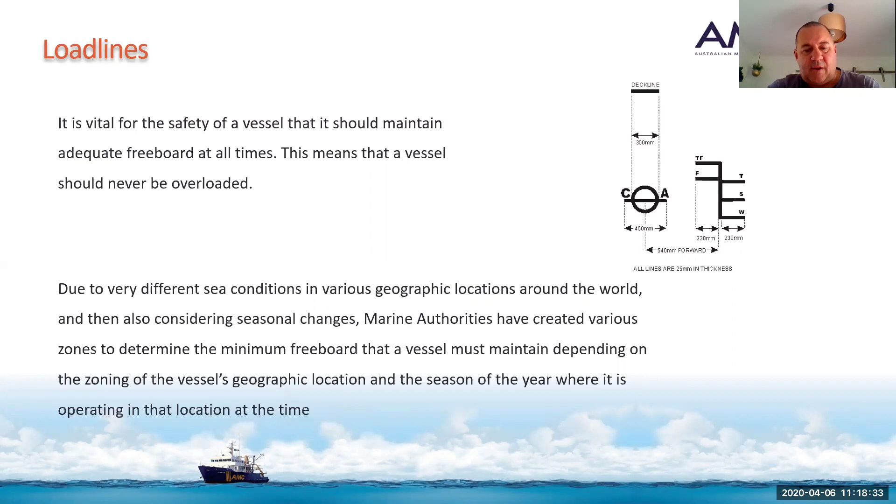Due to varying sea conditions in various geographical locations around the world, and also seasonal changes, marine authorities have created various zones to determine the minimum freeboard a vessel must maintain depending on the zoning of the vessel's geographical location and the season of the year it's operating in. Marine authorities assign freeboard to vessels on the basis that certain conditions are met.

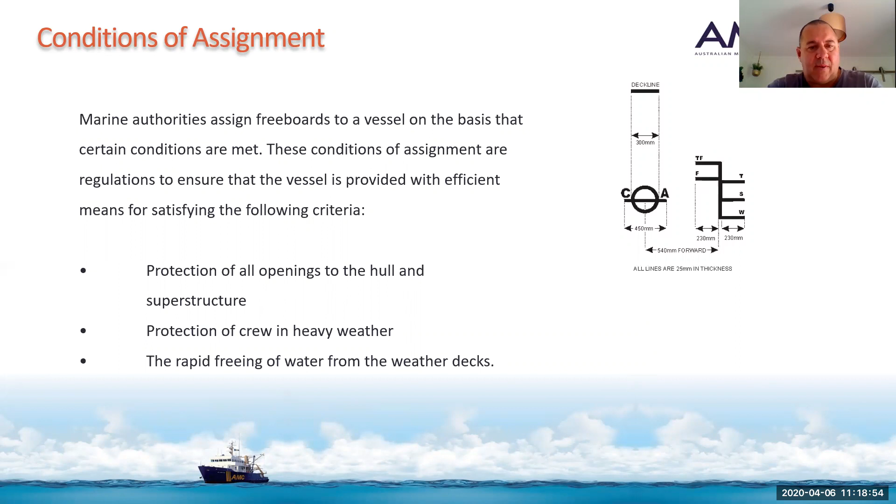These conditions of assignment are regulations to ensure the vessel is provided with efficient means for satisfying the following criteria: protection of all openings to the hull and superstructure, protection of crew in heavy weather, and the rapid freeing of water from the weather decks.

Freeboards are only assigned when the marine authority is satisfied that the vessel complies with the applicable conditions of assignment. These conditions deal with topics such as stability, bulkheads, access openings in bulkheads, cargo and other hatchways, hatchway covers, protection of openings, ventilator coamings, air pipes, cargo ports, discharge inlets and scuppers, side scuttles, guardrails, and loading information.

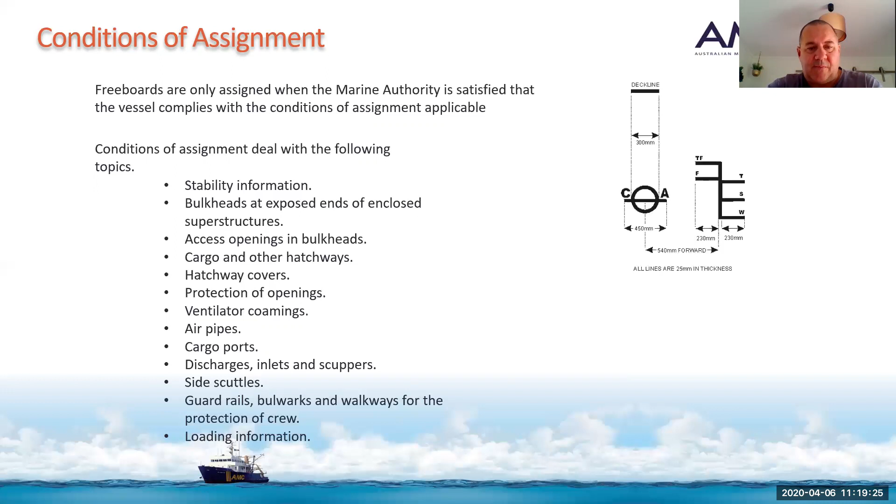So you might have seen a few of these load lines on ships, definitely on cargo ships. The C of A means the Commonwealth of Australia.

On the other side, down the bottom we've got the winter load line, the summer load line, the tropical load line, and on the left-hand side of that line, the freshwater load line and the tropical freshwater load line. These all have markings that have to be a certain width and dimension.

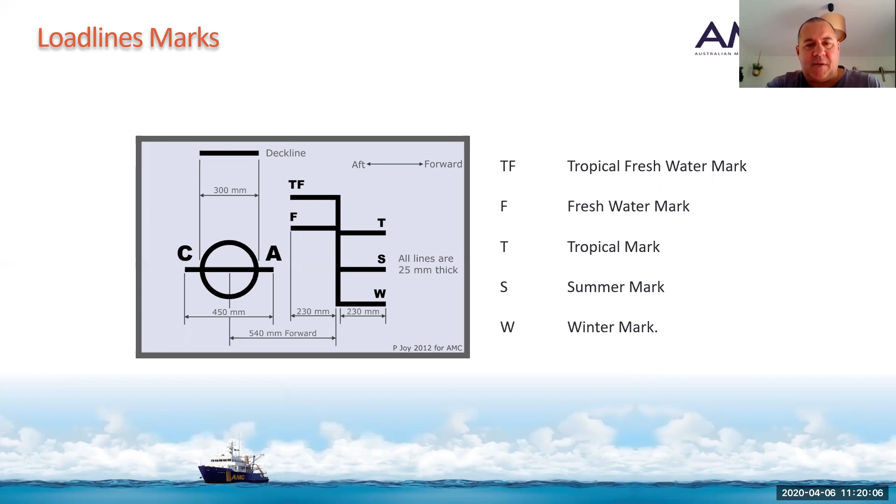They're welded on the side of cargo ships so that we don't move them around when we go back into docks. We don't need to remember, for the Master 35, those particular measurements and how big they are, but they're there for your information.

Australia has different zones, which is all to do with the weather throughout the year. You're in the tropical zone right up the top part of Australia and down to the Whitsundays. You can probably imagine the weather up there is beautiful and calm most of the year within the Whitsundays down the coast.

So they can load up their vessels to the tropical zone, putting more cargo on because they're going to be deeper in the water, but not going to be subjected to heavy and violent weather, as opposed to us here in Tasmania, down the southern part. The weather gets pretty ordinary down there.

So you're not loaded up as much, giving you that extra stability in case the weather is poor.

If a vessel is floating without list in still water of a relative density of 1.025, the load line mark on either side of the vessel that is appropriate at that time would be submerged.

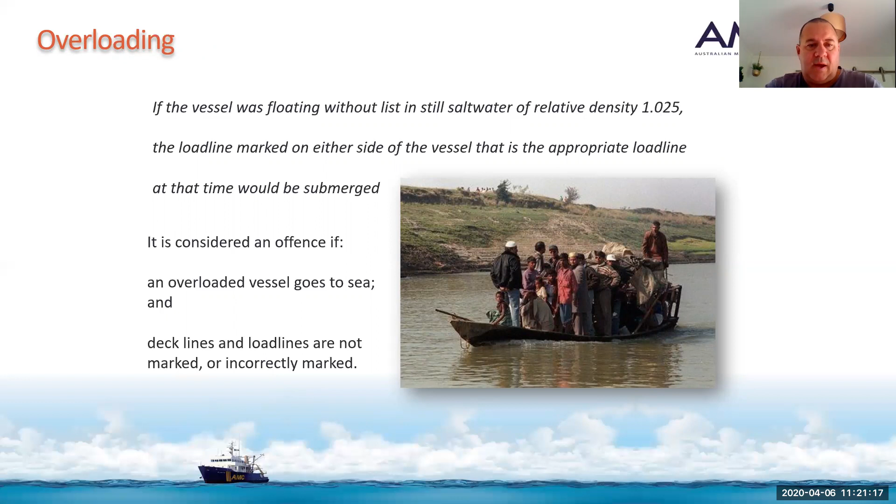It is considered an offence if an overloaded vessel goes to sea and the deck line and load lines are not marked or incorrectly marked.

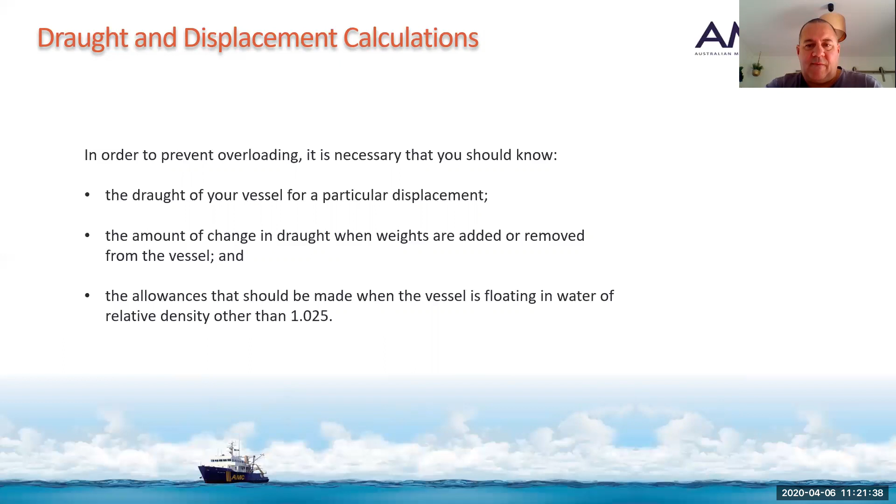In order to prevent overloading, it's necessary that you should know the draft of your vessel for a particular displacement, the amount of change in draft when weights are added or removed, and the allowance that should be made when the vessel is floating in water other than a relative density of 1.025.

So the waterline is just touching the bottom of the 6, after the 1 metre mark. Therefore, the draft is 1.6 metres. If the waterline was just touching the top of the 6, the draft would be 1.7 metres.

If the waterline is not exactly at the top or bottom of the number, you need to interpolate by eye to get the draft reading. For example, if the waterline was exactly at the centre of the number 6, the draft would have been 1.65.

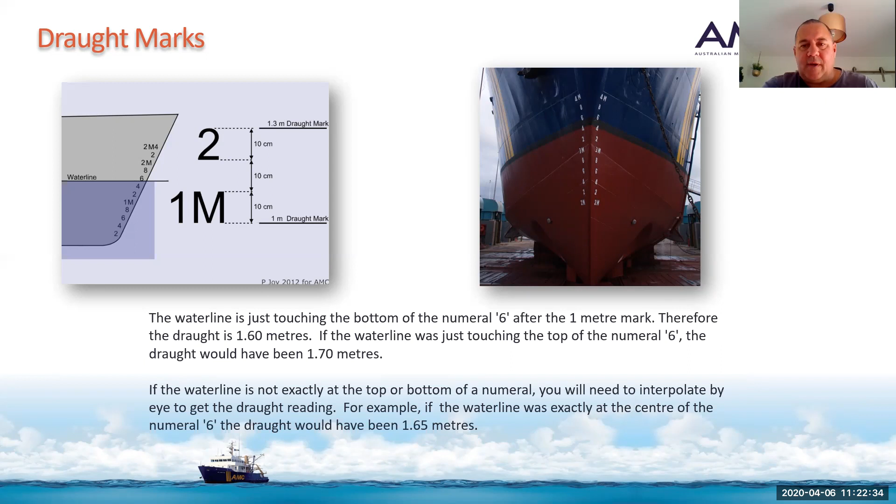If the vessel's aft draft is greater than its forward draft, the vessel is said to be trimmed by the stern. If the forward draft is greater than the aft draft, the vessel is said to be trimmed by the head, and the mean draft is the average of the fore and aft draft. Trim is the difference between the forward and aft draft.

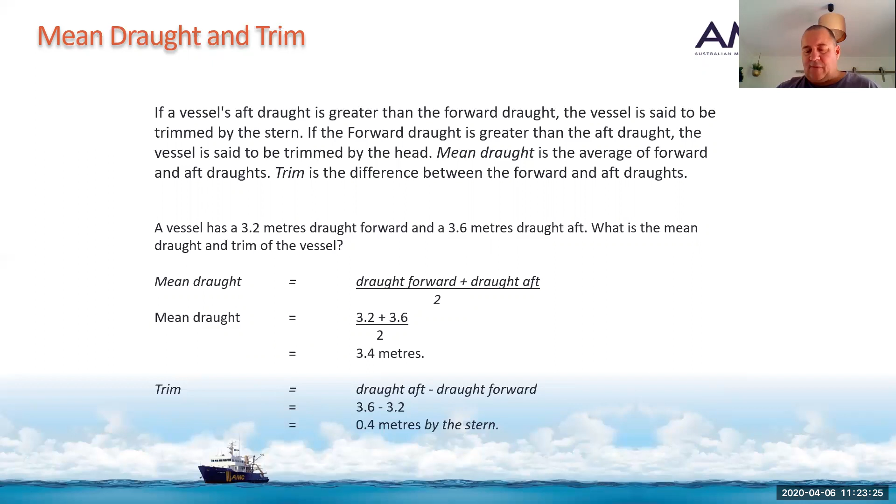So a vessel has a 3.2 metre draft forward and a 3.6 metre draft aft, what's the mean draft and the trim of the vessel? So the pretty simple calculation here, mean draft is the draft forward plus draft aft, divide by 2. So 3.2 plus 3.6 divided by 2, you've got a mean draft of that vessel is 3.4. The trim is the draft aft minus the draft forward. So it's 3.6, subtract 3.2, and it's 0.4 metres by the stern.

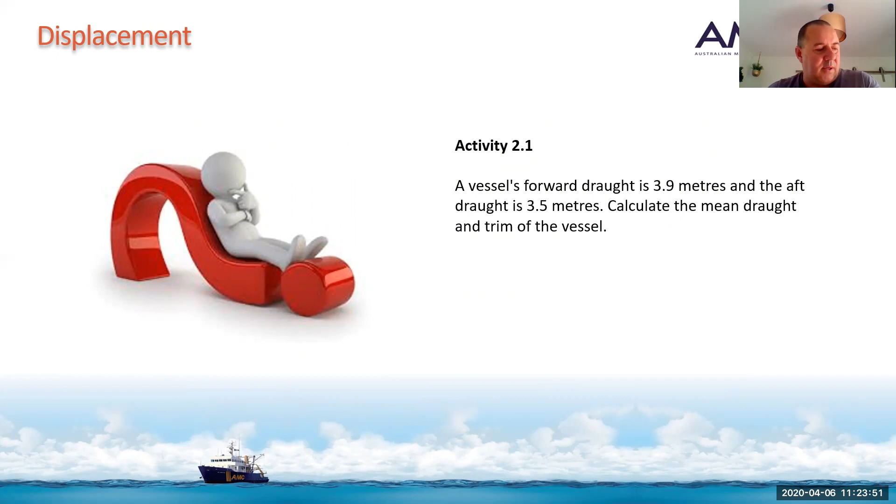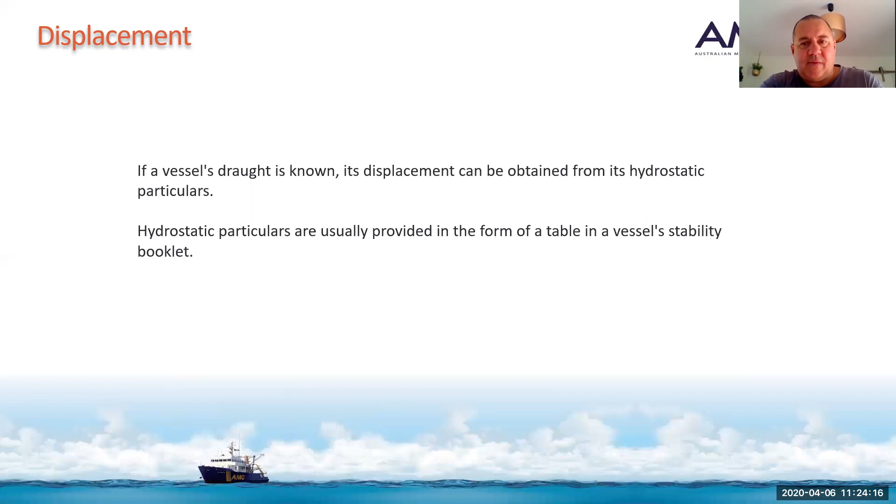If a vessel's draft is known, the displacement can be obtained from the hydrostatic particulars, and the hydrostatic particulars are usually provided in the form of a table in the vessel stability booklet, which is what you used in chapter 1 to do our TPC. So we know that it's got our drafts in there and our weights and our TPCs. And there we have a simple activity there from using the hydrostatic tables in the FTV Bluefin.

How can we use the hydrostatic tables to determine how much cargo or ballast to load or unload to achieve a desired draft? So the Bluefin is floating at a mean draft of 3 metres and the trim is 0. How much cargo can be loaded on the vessel so the mean draft does not exceed 3.3? So you could go to the hydrostatic particulars, you look at the draft at the moment, it sits at 3 metres and it weighs 407.5 tonnes. And at 3.3 metres, the weight would be 480.1 tonnes.

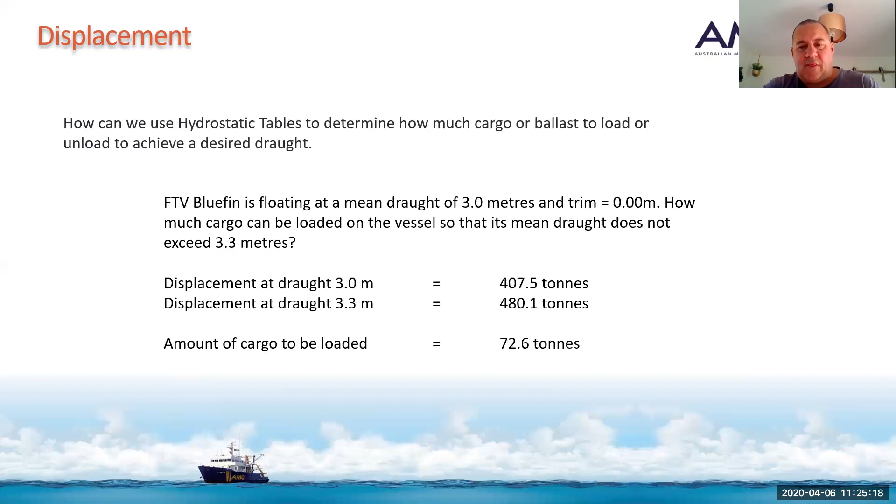So how much cargo can be loaded to get to 3.3? It's just a matter of doing that calculation. 72.6 tonnes can be loaded on that vessel to get it to a draft that doesn't exceed 3.3. Activity 2.3 there for you. We don't use TPC when we're loading and discharging a large amount of weight that has a significant change on the vessel's draft. TPC is only used for doing small amounts of changes.

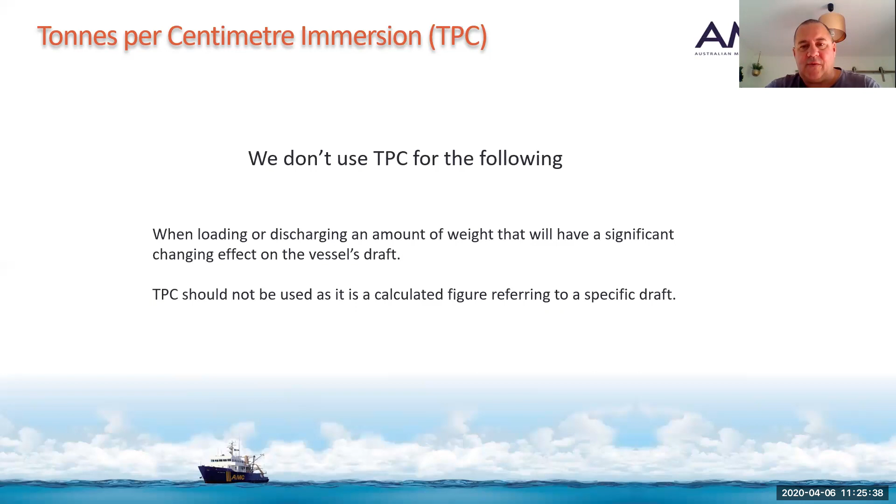All right, so now we talk about the saltwater and the freshwater allowance on a vessel. So freshwater allowance, or FWA, is the number in millimetres by which the draft of a vessel changes as it passes from salt water to fresh water. So the arrow there, the upper edge of the saltwater mark, indicates the draft to which a vessel may be loaded when floating in salt water with a relative density of 1.025 in a summer zone. The upper edge of the F mark indicates the draft to which a vessel may be loaded when floating in fresh water with a relative density of 1.000 in the summer zone.

If a vessel was loaded in fresh water up to the F mark in the summer zone, a vessel will automatically rise to the saltwater mark when it goes into salt water, and the distance between the upper edge of the S and the upper edge of the F is the vessel's freshwater allowance in millimetres.

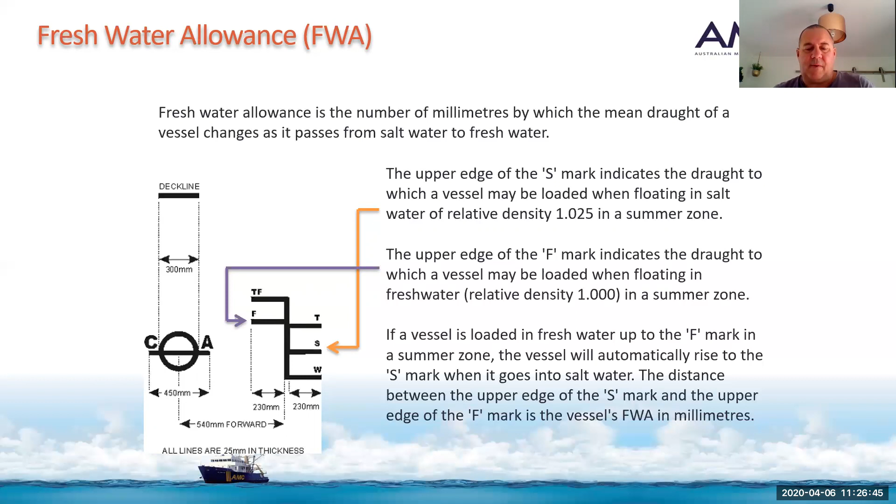So suppose a vessel is floating in dock water of density that is neither fresh nor salt water, but somewhere in between. In this case, the vessel can submerge its summer mark by the amount known as the dock water allowance, or DWA. The vessel will then automatically rise to the summer mark when it goes into salt water.

Dock water allowance depends upon the density of the water that the vessel is floating in, and therefore you determine the density of dock water before you can calculate the dock water allowance.

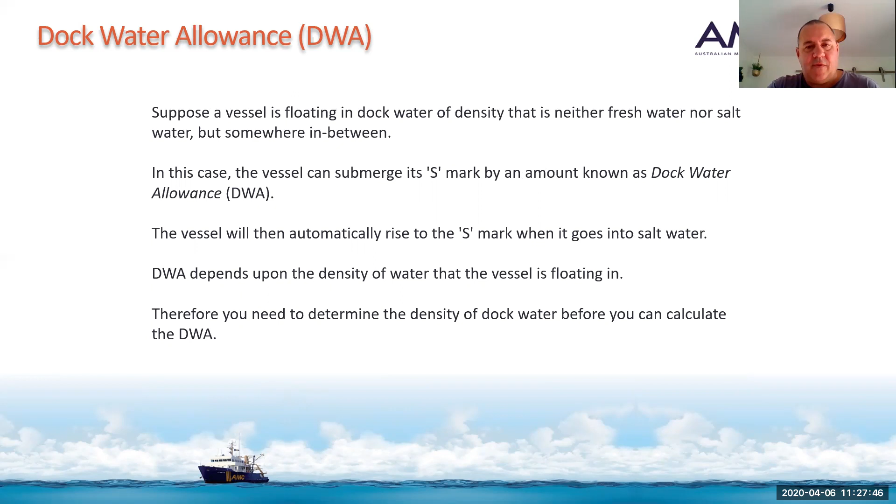So the S mark, sorry, I'm just going to clarify this. The S mark is the summer mark on the side of your vessel, and it's also commonly known as your saltwater mark. So if you do a bit of research on it, some people call it the summer mark, some people call it the saltwater mark. It's neither here nor there, so you might be a bit confused why I just call it two different things, but they are both exactly the same.

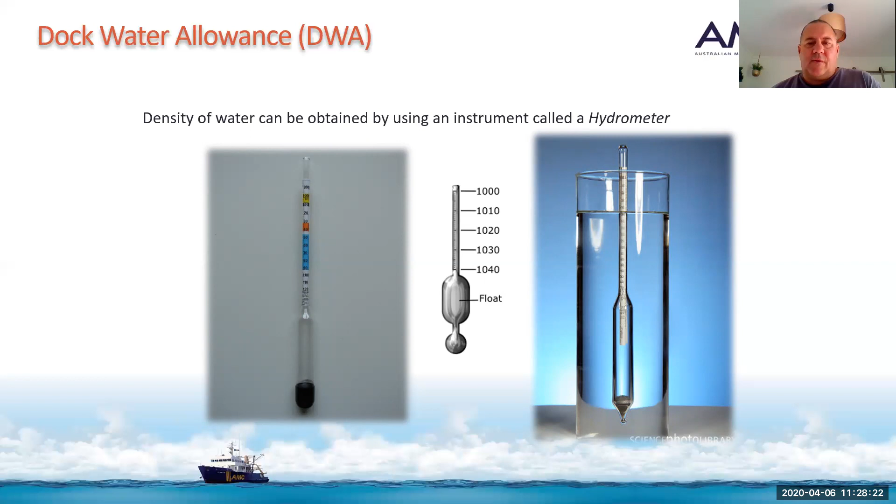All right, so we want to try to work out the density of our water. So if it's somewhere between fresh and salt, we use this hydrometer. So we drop it into the liquid, the sample that we've taken, and we can read it off the hydrometer. Much like when you're brewing beer and it gets to the day when you can bottle it, the hydrometer in that case will tell you, but this hydrometer is for water. So fresh water is 1,000 and salt water is 1,025. So somewhere between that is called dock water.

So this video is a large ship taking a sample of the water that they're actually sitting in at the moment. And to do that, they've got to drop that hydrometer below the first few feet of water, because fresh water sits on top of salt water. So they need to get the sample from down lower. No good taking a sample from just at the surface, because it won't be the correct reading. So they've got to drop it down anyhow. It goes for a little minute, but just have a watch of that one.

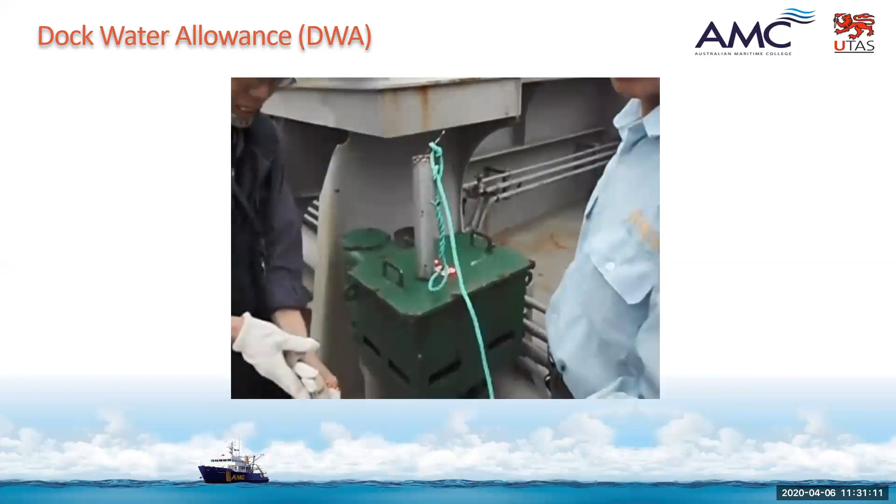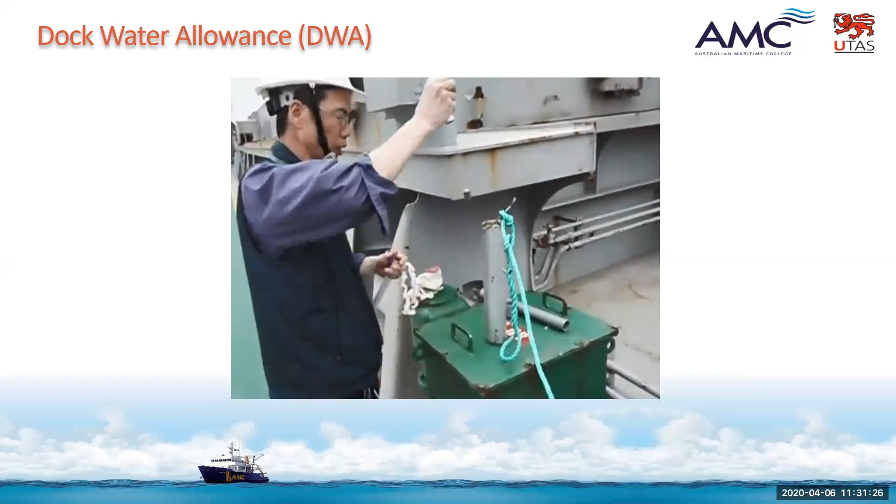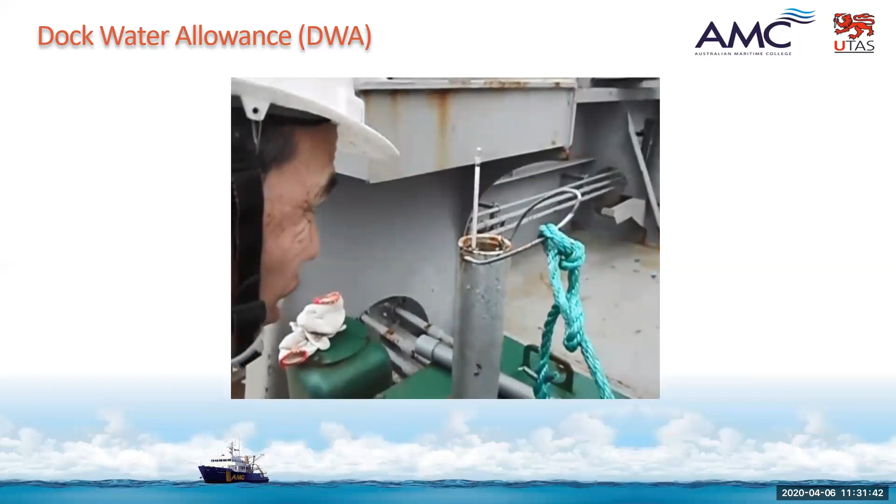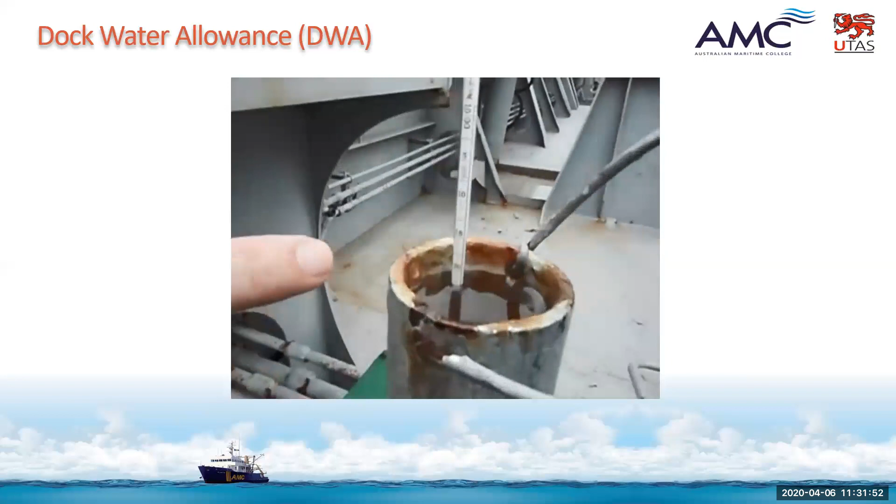The standard hydrometer in our office. 那个簿上面也有。1.022了啊，1.022，你这同我啦，你同我，我话哦，OK, I let you know. Yeah.

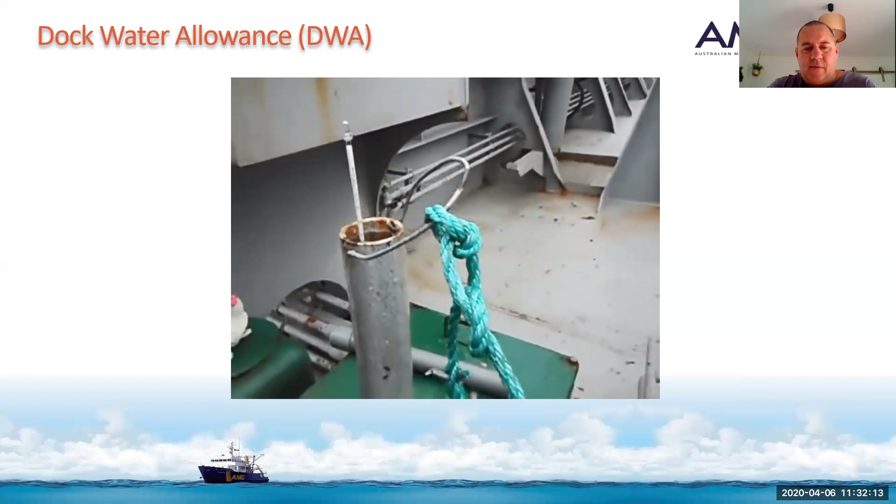All right, there you go. So his measurement there was 1.022. So just a little bit of fresh water where that vessel is docked. For any density between salt water and fresh water, a vessel can submerge its saltwater load line by an amount that is directly related to the density of the water.

So imagine a hydrometer alongside the load line, as you can see by that little diagram there. The distance between the 1,000 and the 1,025 marks on the hydrometer can be regarded as the hydrometer's freshwater allowance. If both the hydrometer and the vessel were floating in fresh water, the water line would be at the 1,000 mark on the hydrometer and at the top of the F mark on the vessel. If both were then transferred to salt water, the water line would be at the 1,025 mark on the hydrometer and at the top of the saltwater mark on the vessel.

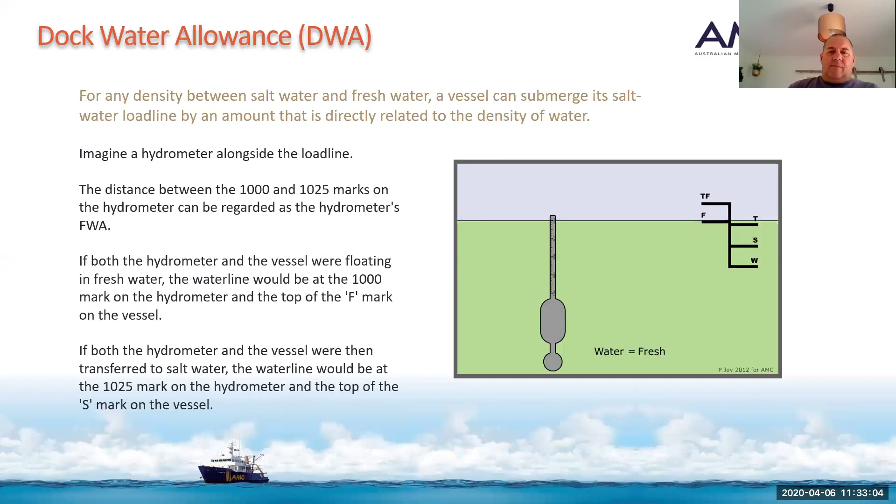The distance between the 1,000 and 1,025 marks on the hydrometer can be regarded as the freshwater allowance of the hydrometer. In other words, we can say that the freshwater allowance of the hydrometer is 25 units. So 1,025 subtract 1,000 is 25 units. These 25 units correspond to the vessel's freshwater allowance of 50 mils.

So that last bit, the 50 mils: every vessel has a different freshwater allowance, but the distance between the summer load line and the top of the freshwater load line on the draft marks of this particular vessel is 50 mils. But the vessel you'll work on would be different than that. But in the examples in the book and in stability in this chapter, they always give you what the freshwater allowance of the vessel is.

So that's the distance between the top of the summer load line and the top of the freshwater. So if you're on the side of your boat and you had a ruler and you marked between those two, that's what your freshwater allowance would be.

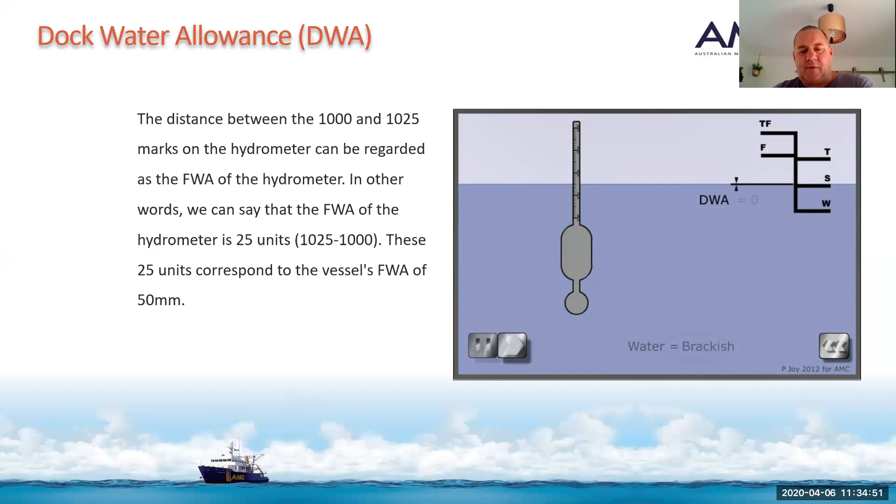So here it goes. It goes from freshwater, heads out the river, and then the water starts to become brackish. You can see that the ship's draft is changing. The hydrometer is changing with the draft because the water is somewhere between fresh and salt. And then when we get out to sea and we're in the salt water, we'll be at the top of the summer load line, and the hydrometer would say 1,025 because that would be the density of the water.

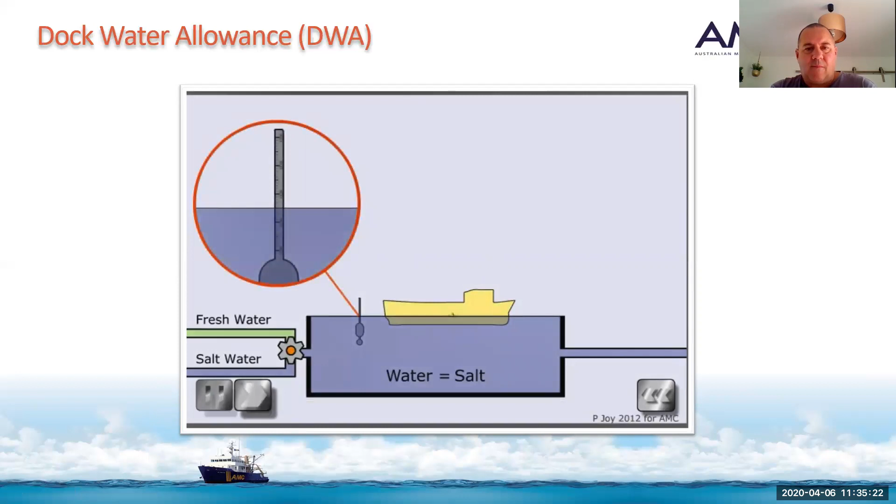Maybe I need to get this thing started. Here we go. There it is. So it's sitting at 1025, top of the summer load line. We then open up the valve and let a bit of fresh water in there. There it goes. And now the water is somewhere between salt and fresh, so it's brackish.

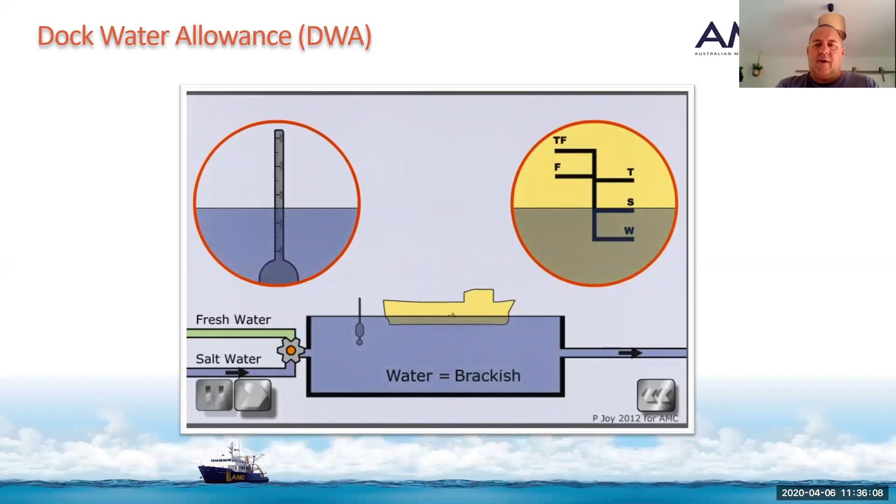As more fresh water is pumped in, the vessel's draft changes until it's fully fresh, and we're at the top of our freshwater load line, and the hydrometer would read 1000. We turn on the salt water and we do the opposite. We start pumping it up with salt water until it's 100% salt water. We'll be at the top of the summer load line and the hydrometer would read 1025. There you go, and that's what happens when you go out to sea.

So if a vessel is floating in dock water of a density of 1.010 tonnes per cubic metre, and the freshwater allowance of this vessel is 50 mils. So you've got 50 mils between the top of the summer line and the top of the freshwater line. And we know that the hydrometer reads 1010. So there's 15 units left between 1010 and 1025. So by what amount can a vessel submerge its saltwater load line so that it's not overloaded?

So the conversion for it is, we're trying to find the dock water. So dock water equals freshwater allowance, divide by 25 because there's 25 units between 1000 on the hydrometer and 1025, and times by 15 in this case, because at the moment there's 15 units between what the hydrometer reads and the salt water on the hydrometer, 1025.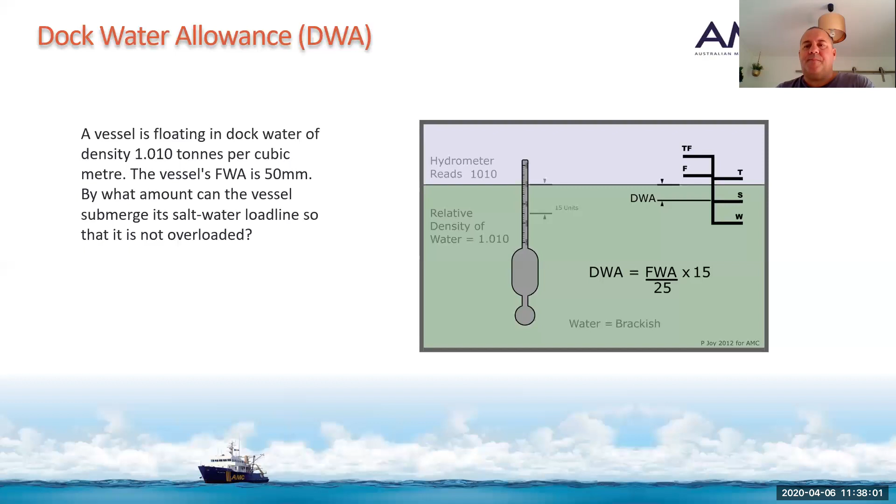So our freshwater allowance is 50 mils, and we divide that by 25, and then we times by 15, and I was just doing it on my calculator. So the answer to that question is 30 mils. So we can submerge our saltwater load line by 30 mils. And then when we go back out to sea, it will rise and we'll be sitting at the top of our summer load line.

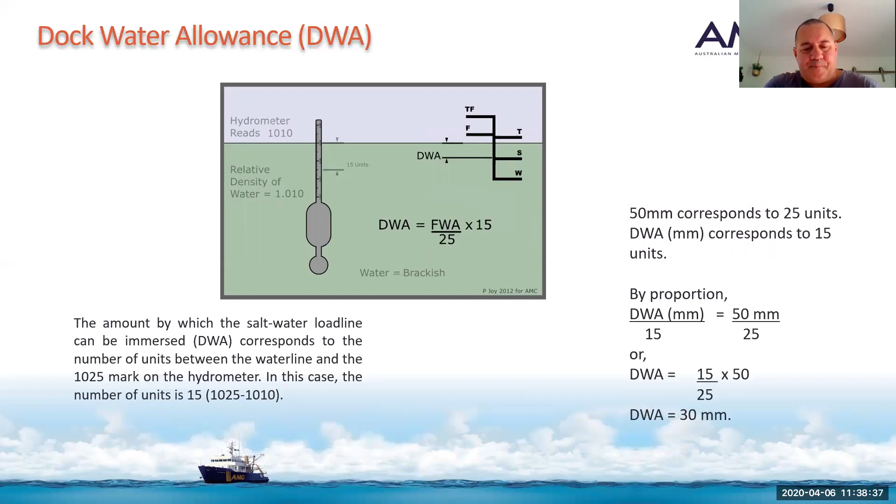All right, so the amount by which the saltwater load line can be immersed in dock water allowance corresponds to the number of units between the water line and the 1025 mark on the hydrometer. And in that case, that was 15. All right, so there you go. So that's the way to do it. There's a few different examples on different ways that you can come to the same answer. But sometimes the little picture I put in front of you there is a simple way to do it. So there's some other ones to get to the same answer of 30 mils.

All right, so this one, a vessel is floating in salt water with a specific gravity of 1.010 tons per cubic metre, and the vessel's freshwater allowance is 30 mils. So this one, they're saying there's only 30 mils between the top of the summer load line and the top of the freshwater load line. So the distance there with the ruler on the side of your ship would be 30 mils. The specific gravity of the water is still the same. It's still 1,010. So there's 15 units.

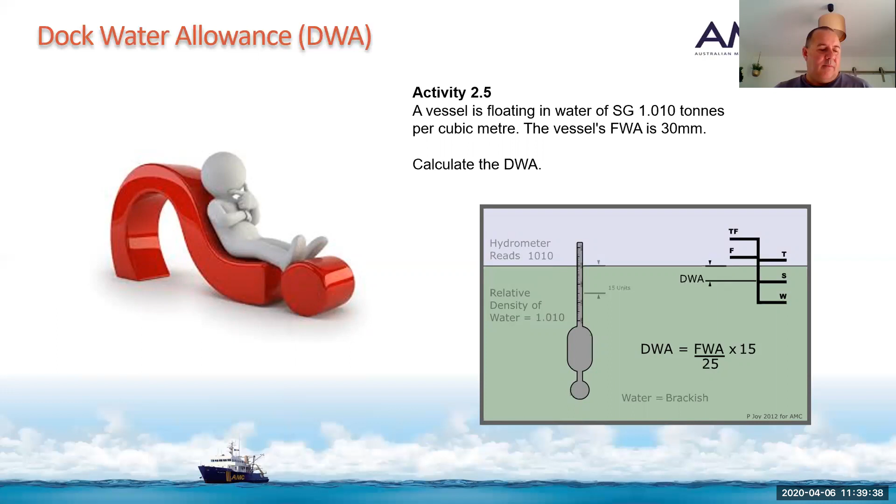So its freshwater allowance would be 30. Divide by 25, times by 15. Let me just have a quick look at that one. So we've got 30, divide by 25, times by 15. You should get about 18 millimetres. So you can submerge your summer load line by 18 millimetres.

All right, so there's a few of those in the progress check to do, so you get a little bit competent with them. But if you follow that formula, it should be fine. So make sure you do all those examples. So I've got something to review, and then we'll move on to chapter 3. Thank you.